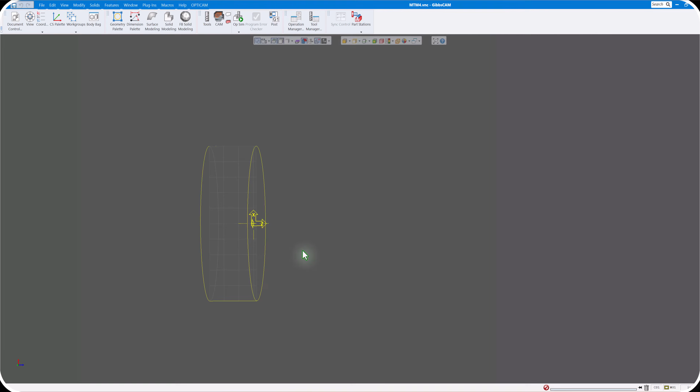First, make sure you are on the correct machine. In this case, we're going to do Mori Seiki DMG NLX 2500 SY. You can choose any other machine because we'll be programming it the same way, whether it's a Mazak, Doosan, Okuma, Nakamura, just about any machine with a main spindle, sub spindle, and a single turret. This is a single turret tutorial, not a double turret. So first, choose your machine, and we'll leave these blank for the moment.

For main spindle, let's jump down to sub spindle, and for right now, let's just zero these out.

We'll go to no zoom, let's go to top view and no zoom. You'll see we have a main spindle and sub spindle, but we don't want to have both of them showing at the same time, because when I do a no zoom, it shows both. I just want to work on the main spindle right now, then we'll go work on the sub spindle by itself. So the first thing you usually want to do is go to the part stations and turn off the sub spindle by clicking on the eye. Now when I click on no zoom, you just see the main spindle.

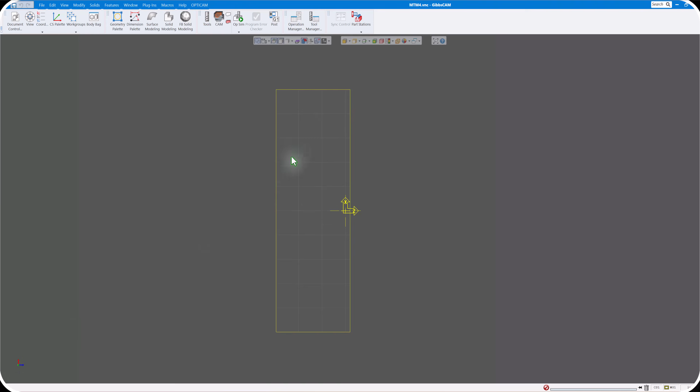So we'll work on the main spindle, then we'll work on the sub spindle, and then we'll do the rendering, and so on and so forth.

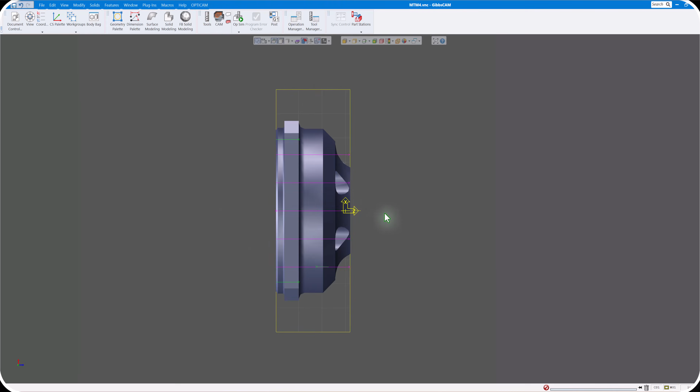Next we want to bring in our solid model. So let's go to File and Import. This is a SolidWorks file, so just open that. Now we have our SolidWorks file in here. It's already in the right orientation. Now I want to get rid of these here.

I'm not going to do feature recognition on this part. So what you do is go to View and turn off the Show Hole Features. If you want to use feature recognition, you could use this Hole Manager - it'll find all the holes, dimensions, and everything else for you, but we're not going to do it in this tutorial.

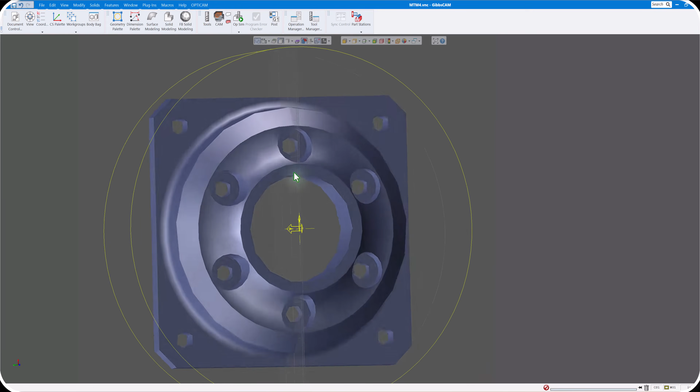Now you also notice it's a little bit chunky there, and the reason is I have my preferences set at 10 thousandths. So if I go to File, Preferences, you'll see it's set for 10 thou. This should be 1 thousandth - when you originally set up GibbsCAM, you should have the chord height at 1 thousandth. Just to let you know that as well.

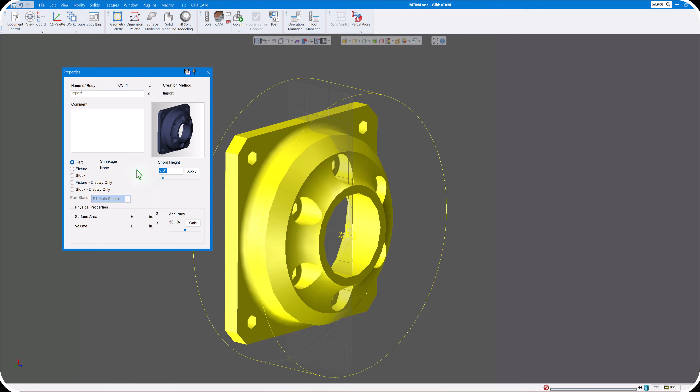But let's say we brought in our solid and we want to change it. If you brought in a bunch of solids and want to change them, just click on your solid there. If you have multiple solids, you can select them all. So let's select our solid, right click, go to Show Properties. If you had a number of solids, you could go Show Properties of Selected, which would show them all. But we just have one part, so right there you can change it to 1 thousandth, which is pretty good for just about every size part. You can see that looks a lot better. That's one way to change it on the fly if you've already brought in your solid model.

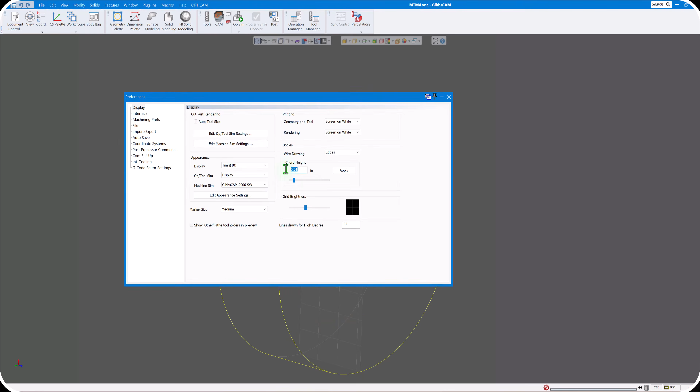But let's show you if we went back to File and had our preferences already set to 1 thousandth, click Apply. Now anytime I bring in a solid model, so import this again, you will see it's already nice and smooth and round, so everything looks pretty good.

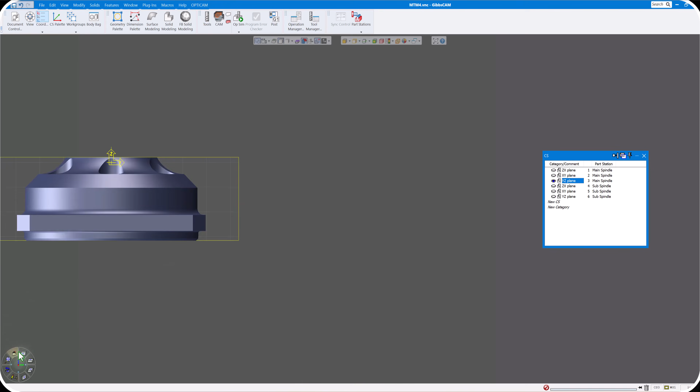Now you always want to check the orientation of it, especially when doing milling. Like when I'm doing milling here, I try to choose and rotate it to where it's easiest to program. In this case, if I went to my coordinate systems and went to the YZ plane and clicked on the home view, you can see this flat is parallel with the YZ plane, which is how I want it anyway, so that's good. So it's all oriented correctly.

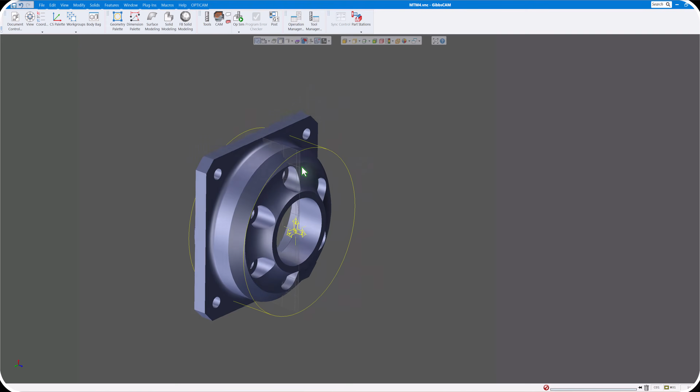So let's just do Modify and Shrink Wrap, usually what we do, and it shrinks material around the part. Now in the case of a square like this, with some corners on it, it's not necessarily going to find the outer dimensions. So I'll go to Document Control, back to Main Spindle, and change this to 2.5 inches. We'll look and see, yeah, that'll clear everything on our part. So that looks pretty good.

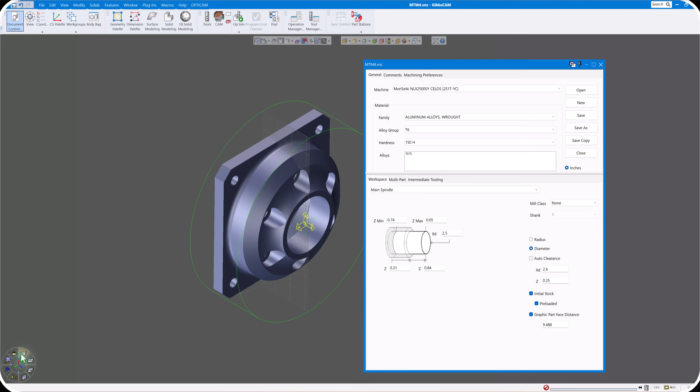Okay, if we go to Document Control again after doing a shrink wrap, you can see this origin right here. If I go to a side view, you can see it's back behind our part. Since we did a shrink wrap, it says the material is 50 thousandths in front of the origin.

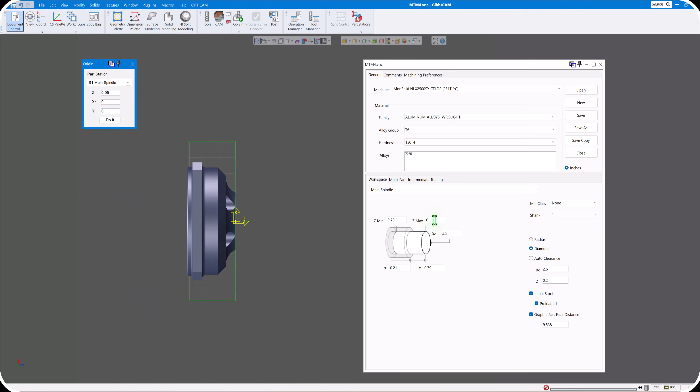So I want to move the origin to the very front of our part because I want this to be Z0 when we machine it. To change that, go to Modify, down to Move Part Origin, and change the Z to 50 thou. Click on Do It. Now you can see our origin is right at the top, and it automatically changed the dimensions in here for us. So we have Z0 there.

Now, before I fill out the rest of this, I want to see what our material needs to be before we start doing any machining or geometry. So we want to figure out all these dimensions. We can see it's 0.79 from the front to the back of the part right now, but of course we need to add material for this as well.

Right now I want to add 1/8 of an inch of material on the front, and maybe a little more on the back because my jaws are going to be sitting right around here, and that's not much to hold onto. So we'll add a little more stock to the back side. As far as the front goes, let's add 1/8 inch there, and you can see there's our material, 1/8 of an inch. Now if I put in, it says 0.79, minus 0.125, that makes it 0.915 — kind of an odd size for a saw cut, so I'll just say minus 1 inch on there. That'll give us plenty of room to grab onto and machine.

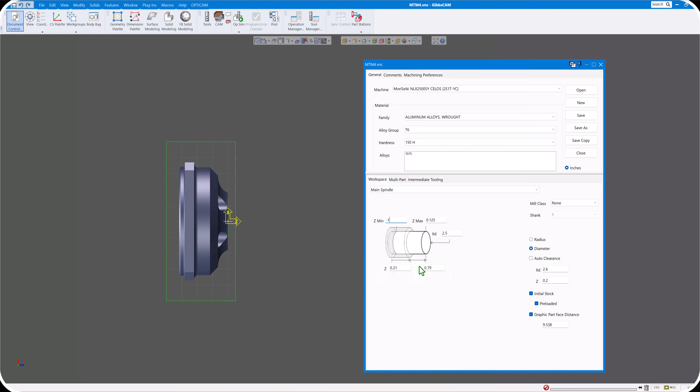So next, before we fill in these two, I want to pull the geometry off the part so we can do some measurements. I'll click on the profiler right there where it says Slice Spun Body — that gives us the geometry we need for machining, for turning. I'll click on the green area, it turns blue. Right click, click Extract Profile, click Do It, then turn off the profiler. And there's your geometry to machine the part as far as turning goes.

Now I want to add a few more dimensions here. This will make it easier to put in the correct dimensions on the sub spindle. So let's bring up the geometry palette and click on the point command, XYZ. I want to put a point out here, 1/8 of an inch there — this will make more sense when we go to the sub spindle. I'll go up 1.25, and we'll say 2.5 because that's the material I made it out here. This could be at 0, but we'll keep it up here — it'll be easier to do dimensions.

So click on the double point, so I have a point there now. I'm going to go minus 1 inch, do a point there, and you can see that's at minus 1 inch.

Okay, now we can do some dimensioning here. Bring up your dimension palette. I'll choose this one right here, and click on this icon as well to make sure it stays open. I want to put a dimension from here to probably right here — that's probably where we want to grab with the sub spindle, right before the radius. So I'll put that there.

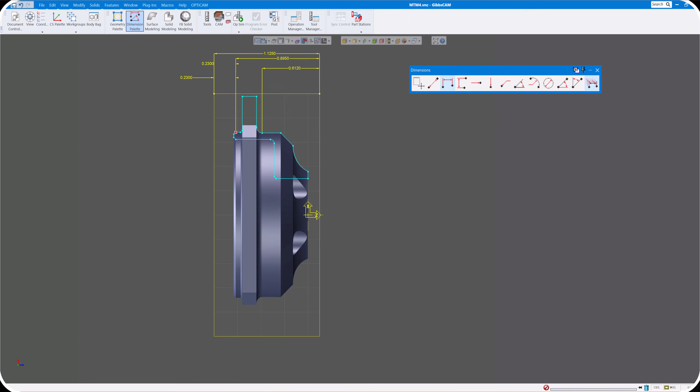I think that's all the dimensions we really need for right now. This will make more sense when we go to the sub spindle, telling Gibbs how much material is sticking out. So everything looks pretty good right there.

Okay, so let's bring in our tool list. I haven't created one yet, so let's just import our tool list into here. We're going to go to station number 1, right click, go to load tools, and this is our tool list for class 6. This will be on the YouTube page as well, so you can download it if you'd like. But here's all the tools now. Let's just go through all of them.

This is going to be an 80-degree diamond, CNMG, 32nd, half-inch IC or inscribed diameter, 1/8 inch thickness. This could be 3/16 as well, whatever you'd like. It's in station number 1, and you can see it right here. The length out is 6 inches - I think I want to change that to 4 though. I always give it a name on here, so when we put the code out on the machine the operator can see exactly what this tool is supposed to be doing. So I just put main spindle, rough face, and OD. This is, of course, offset number 1, X positive side.

And we want the insert facing backwards. We don't want to click on insert face up because that's an M4, and that'll force the chips into the operator or the front of the machine. We want the chips to stay at the back of the machine, so that's why I have it sitting in this direction.

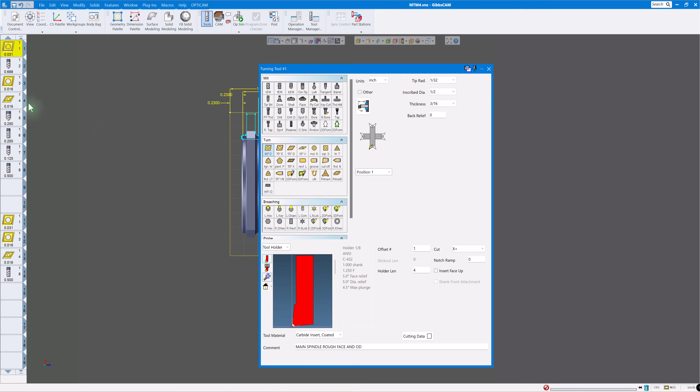Let's look at tool number 2. This is just a drill going through the part. I have 175 degrees, so it's almost flat. So if you have an inserted drill, you could do that, or a carbide saw, whatever you'd like to do for this. And of course, give it a name: main spindle drilling. I have length out of holder 3, tool length offset 2. This should also be 2.

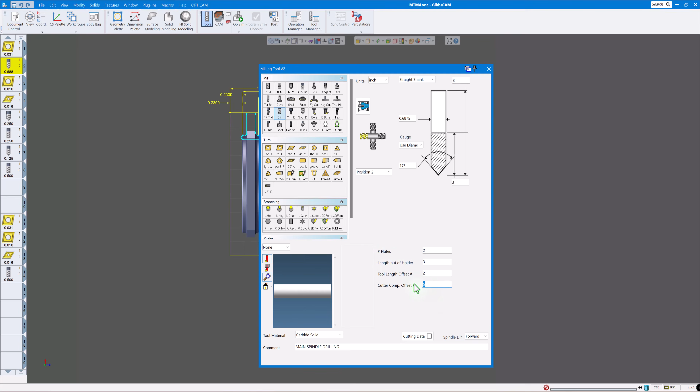Just to clarify, this is going to be the boring bar here. So this is a 64th tool nose radius, 1/4 inch IC, station number 3. Now I don't know if I want that small of a boring bar. You can choose that - you can see minimum bore is 600 there. I haven't dimensioned the bore yet.

Let's put in a dimension there just so we know what that actually is. So we'll put this bore right there - that's 3/4 of an inch. So this is 600, so that's probably okay. If we go bigger than the actual part size, then Gibbs will not let the tool go inside there. So this looks pretty good, we'll keep that there.

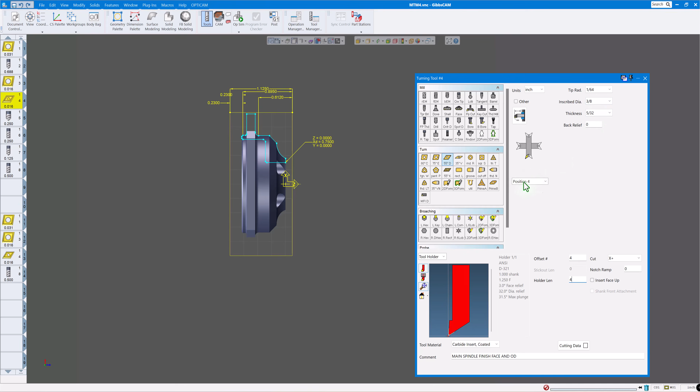Next tool is a 55-degree holder. We'll change this to 4 inches as well, with a 64th radius, IC 3/8, 5/32, station number 4, offset 4 - so make sure all this matches. X plus.

This is going to be the holes in here. This is going to be, of course, a spot drill first in position number 5, 1/4 inch, 2 flute. Then we have our 1/4 inch end mill to do the counter bores, and 1/8 of an inch for the holes in there, and 1/2 inch to cut the periphery of the hexagon there with the square with the corners. And then the rest of these are for the sub spindle.

This is going to be also a CNMG 80-degree diamond. It's in for the sub spindle. We'll change this to 4 inches as well. And this is going to be offset number 17 - so we're adding 16 to this to make an offset 17.

Now you can change this to whatever you want, depends on your machine manufacturer what the sub spindle tool will be, but just make sure this offset matches the sub spindle for the backside tool. You wouldn't want to give this position offset number 1 as well, because we already have that up here at the top. So this has to be a different offset, but it's going to be in the same turret location, position number 1.

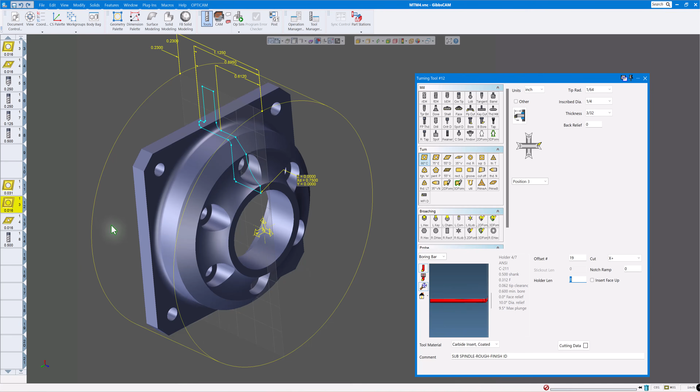Okay, next one is going to be a boring bar to finish off the back side. As you can see, we have backside boring that needs to be done as well. We'll unzoom this and go to home view there, and again, give it a name.

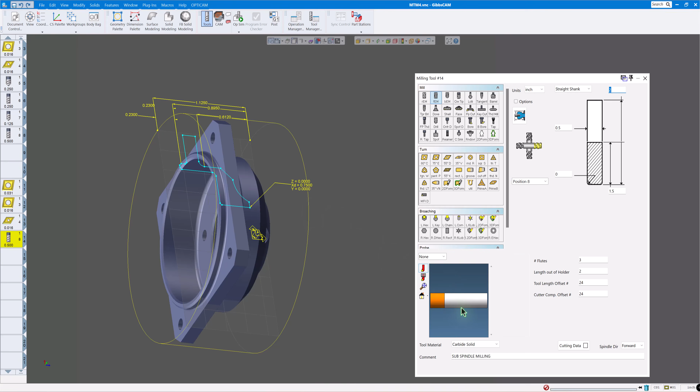And of course, 55-degree on the back side. That's going to be in position number 4, same as up here, but a different offset, so I chose offset 20. And then a 1/2 inch there to finish off the back side. I think we have all the tools we need there.

So let's unzoom this, home view, unzoom. Now let's open up our document control, fill in a few blanks here. Main spindle, 2.5, this is correct, all here.

Now we need to figure out how much material is sticking out of the jaws from when we grab it on our main jaws here. As you can see, since we dimensioned it, we're going to grab right here with our jaws. Dimension 895 is sticking out from our jaws on the main spindle to our stock. So right here, put in 0.895.

Okay, now it needs to know also how much is actually in the jaws there. As you can see from right here where our jaws are going to be to the back is 0.230. So I'm going to change that to 0.230. All right, that's good, everything's there, perfect.

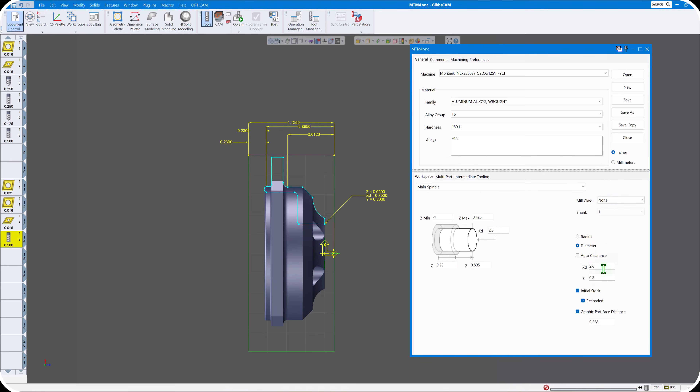So we have diameter we want to program, of course, in inches, we don't want to program millimeters, we're in inches. We have 2.5 inch stock, 2.6 will give us enough clearance for this. You can always go bigger, it's up to you. And instead of 0.2, I'm going to round this off to 1/4 inch there. Initial stock means it's already loaded in the spindle when you press cycle start, and preloaded.

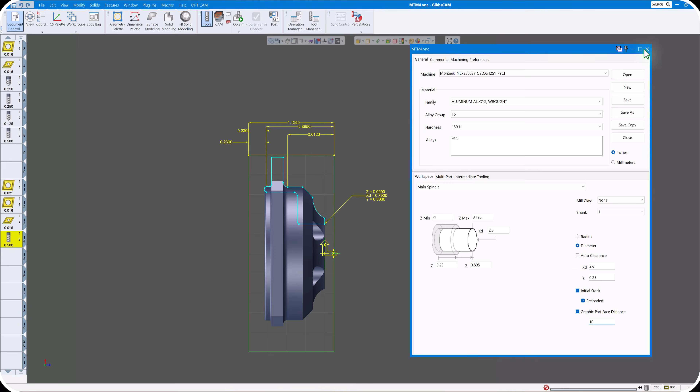Okay, so it's all ready to go. And this graphic part face distance right here, I'm just going to put 10 inches in there. Now what this means, let me just show you. We'll put 10 inches in there. Let me turn on the sub spindle just for a moment. Now if I go to no zoom, you can see that's approximately 10 inches there on our screen.

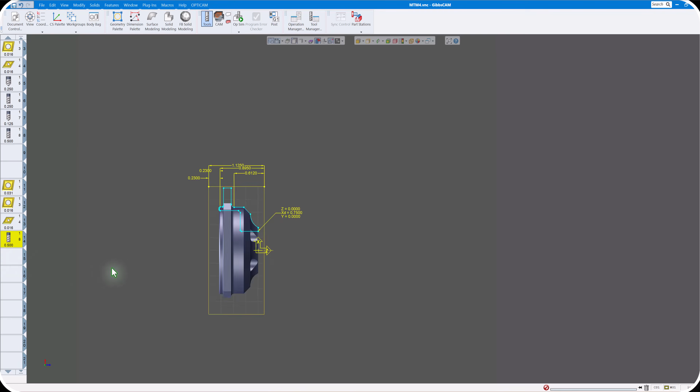Now if I put what the actual machine is, which is around, let's just say 25 inches there, if I do that, when I do a no zoom, you can see how much space there is between the two. So you're always having to zoom this up and work on that and zoom up the sub spindle. And so it just makes it easier. The programming will still be the same.

Your G-code output will be the same no matter what you have in here. This is just the distance that you see on your screen between the two spindles. So that keeps you from having to pan main spindle, sub spindle. So let's just put about 10 inches in there, that's usually about what I do most of the time. And no zoom, and you can see now the spindles are a lot closer together, so when you do rendering, it's easy to see the two spindles without having to do a lot of panning.

So let's turn off sub spindle for the moment. We're going to just program the main spindle right now. I'm going to turn off dimensions. Okay, I'm going to turn on my cam.

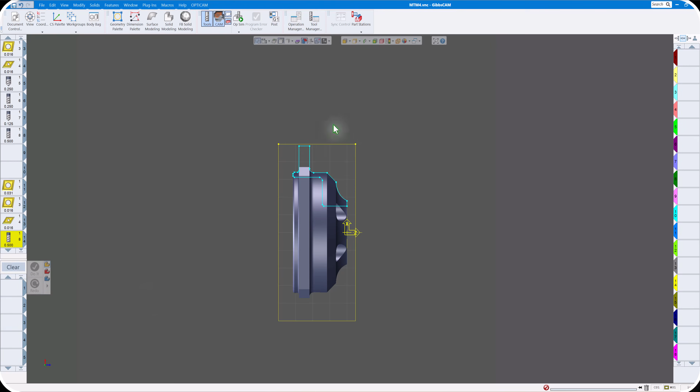So the first thing I want to do is, of course, face this off. So I'm going to put in, just double click this process, put in a roughing process there with tool number 1. We're going to do a front face. This is our clearance values before we cut, clearance before we go back home or do the next operation. And we have an 1/8 of an inch material to face off here.

I'm going to say cut depth 50 thou there. We're cutting forward, front face, all that looks pretty good. XR stock, really don't need anything there, but Z stock, I'm going to leave 3 thou there for the finish pass. Now, depending on the material, you can click on the material, speed, RPM, and feed.

And of course, depends on your material. We chose, as far as the material goes, aluminum alloys, so you can, of course, change whatever material you'd like there. And since we're facing it off, I'm probably going to do constant surface speed, and we'll figure that out, surface speed 8,000, which is a little fast. And since it's aluminum, you'd probably be okay, but let's just change this. I'll show you how to change this.

So let's go to the material, and this is the material database. Let's modify that database. Let's say surface feet per minute is suggested 8,000. That's a little faster than I want to go. I'm going to say, let's change this instead of 8,000, let's change it to 2,000.

6 is okay for right now. So we just modified the tool database. Material database - let's just do surface feet per minute. You can see now it's 2,000 surface feet per minute.

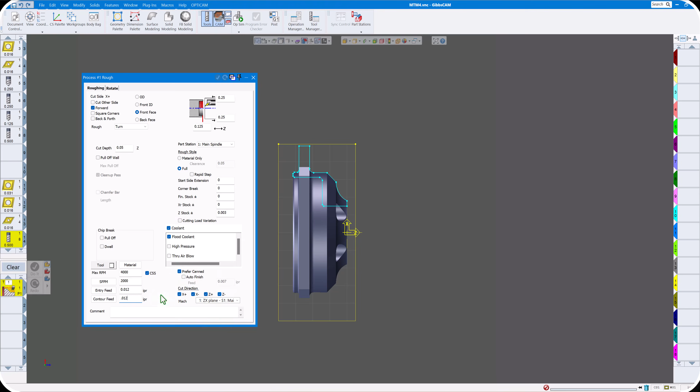Okay, so let's click on this front face right here. This is what we want to finish. You can drag this marker to above your stock, or you can right click and say move to whatever you'd like to put in there. It's up to you. If you want it a certain distance away, that's up to you.

Of course, arrow down, we want to face from the top down. And we want to put the black round one close to X0, Z0. Just don't go below it. If you want, you can put a point there and just have it snap there.

And you can also right click and say, I want to move it to the endpoint, maybe you want to move it right to 0. That's up to you, that'll put it right at 0. And then click on Do It.

So there's our toolpath there. If we want to render, we can render right at the same time. Slow it down, and so you can see, looks pretty good so far.

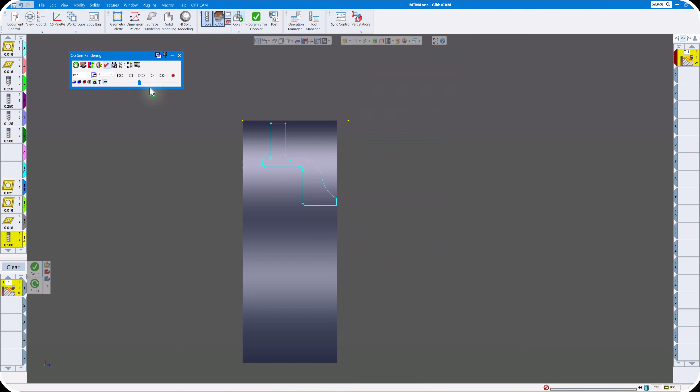Now we're using the same tool to cut the OD, so we chose OD. Remember, we have our clearance at 2.6, that's fine. This is the material, 2.5 inch.

This time I'm going to say cut depth of 1/8 of an inch is just fine. For XR stock, I want to leave some stock to finish, so that'll be 10 thou per XR radial value, so 20 thousandths overall. Everything else there looks pretty good.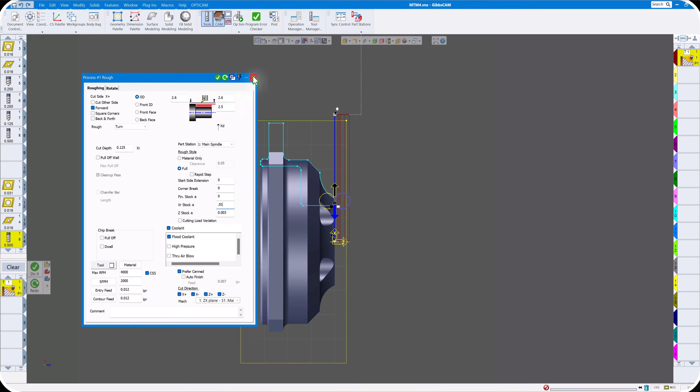Canned cycle, all that looks good there. So I'm going to click on this radius to start out with, start outside of our part a little bit. The easiest way is just hold Control and Shift, click on the last feature you want to cut, and we'll go a little bit past there. We don't want to go into our jaws - remember, our jaws are right here, so we don't want to go too far past that. Click on Do It - now we have our roughing finished out.

Okay, let's clear this. Now we want to drill this before we finish the outside because of stress relief. So this time we want to do holes, and this is not live tool, this is static, so hole, with our 0.688 drill.

Okay, front face. We had our clearance set at 0.250, so I'm going to keep it there. And we faced almost everything off. There's 3 thou there, but we can have 3 thou in there or 0 - it doesn't matter, either one's good.

Let's click on this button right here, and you can see the line goes down to the edge or the chamfer on the actual drill there. And we'll hold the Alt key down and click on there. Remember, that was 1 inch, so that's right to the stock there. We want to go a little bit past, so I'm going to say minus 1.1.

Okay, again, we can put in our RPM feed rate there. Pretty good. Canned cycle, everything just feed in, rapid out. You could choose peck in that, but if you have high pressure on right here, then you really don't need to peck - you can just blow through there. So let's click on Do It.

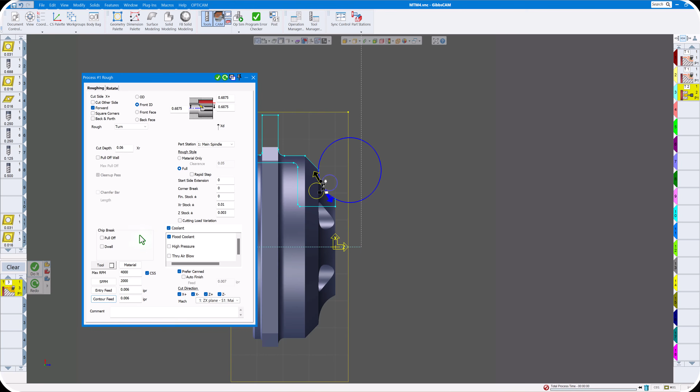Stock and Z is just fine. All that looks pretty good there.

Let's click on the bore there. We want to start outside our part, going from the right to the left. Our black one goes to the end of our part, a little bit past it, so we make sure the bore goes clear through it. Click on Do It, and we have a couple of passes in there, not too many.

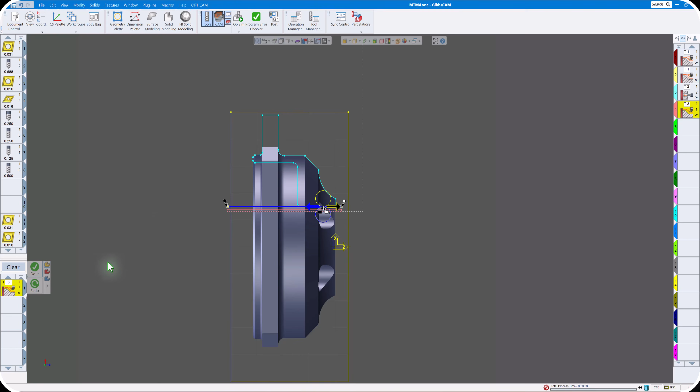Now since we've roughed everything out, at least on the front side, let's finish it. Let's clear this out, double click, and do a contour with that same boring bar. Front ID, about the same place we want to wrap it to, main spindle, 90-degree line there, so we'll come off there, which is fine. Entry and speed, all this looks really good.

Okay, everything looks good there. Let's move our markers around, starting off our part in that direction. We actually just need to finish here because on the back side we'll cut all this out. So let's do it. One thing I need to choose though is the cut on the inside, not the outside. So instead of deleting this, just click on redo, and that'll redo that toolpath.

Okay, so all that looks pretty good so far. Let's do a rendering, see where we're at. Let me slow it down and start over.

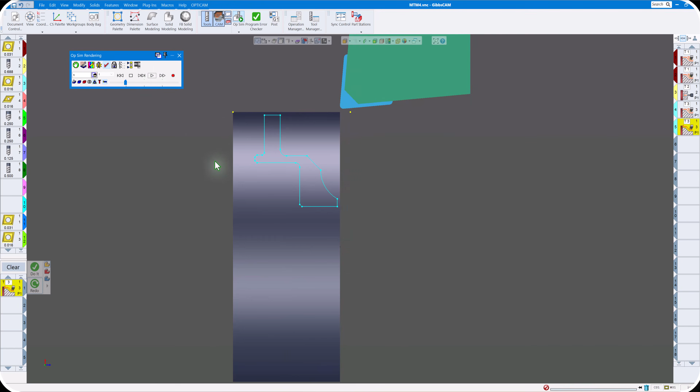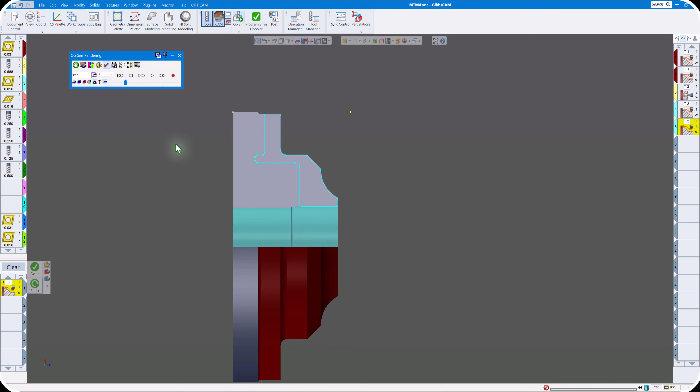Face. Now we're roughing the OD. And of course drill, let's show you a cutaway view there. And bore and finish bore. So far so good. Okay, let's finish the outside now since we finished the ID.

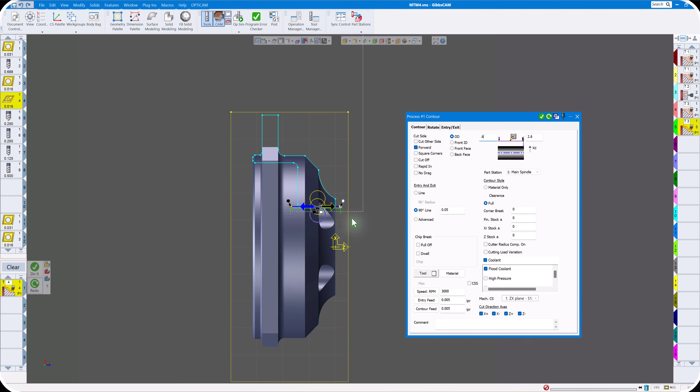So we can leave contour in there, let's just open that up, and of course bring our tool down. You can just drag and drop a tool on top of there - that's tool number 4, we're going to do the OD. Now I don't want to start at 2.6 up here and then feed all the way down here. So we know our bore is 0.688, so let's just rapid to 0.6 there. The tool is going to rapid to 0.6 before it starts going in to cut. We have a 50 thou line in there before we start cutting. Entry feed, and all this looks good.

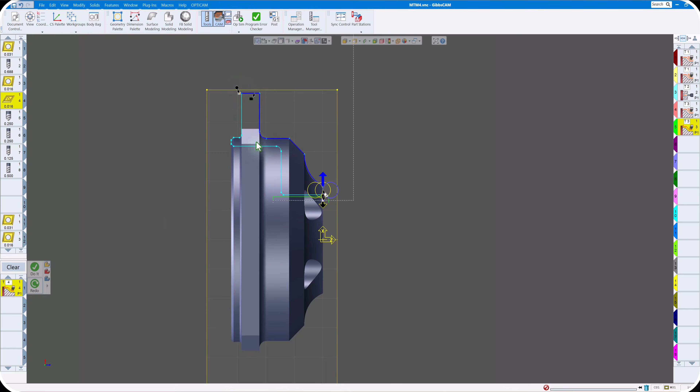No stock there. Okay, click in space. I'm going to start right here, zoom up a little bit, lower than our bore, that direction. Again, I'm going to hold Control and Shift, click on this last line here, and just a little bit past there, and click on Do It. Now we should have a finish pass there for our part for the OD. So there we go.

And that looks good. So everything on the front side has been all machined as far as the turning goes. Now we need to do some of the milling.

So let's just go back to isometric view, and I'm going to give it a new work group. This work group was the original one - I'm just going to call this turning. I'll turn on caps there, a little easier to see. So this is the turning.

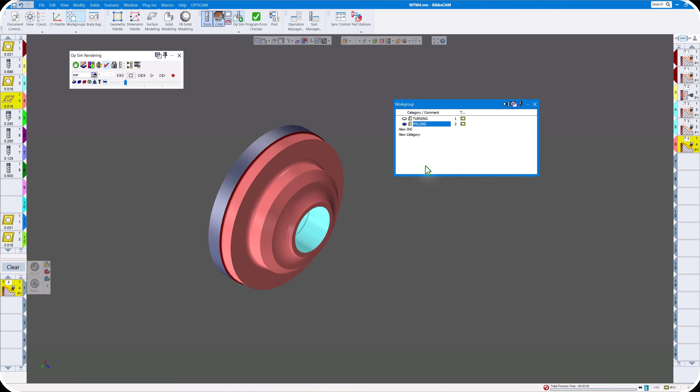I'm going to separate the turning and the milling so it's easier to choose what we want to cut. So I'm going to click on new work group and call this milling. If you want, you could put turning main, milling main, and then turning sub, but we'll just keep these two here for right now. So now we have another work group, and as you can see, the geometry is gone for the turning portion of it.

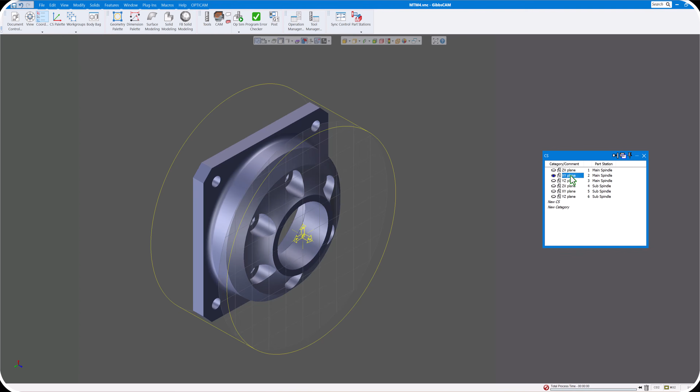Let's turn off our cam because we need to bring up some geometry. I'll turn off tools while we're at it. And since the tools are coming from the face, I need to change my coordinate system to the XY plane - as you can see, that changes right there.

Now we can extract geometry, or we can use a profiler, or a combination of both, but let's just do face selection right now. Let's just click on this face right here. Looks like we have a little radius in there, which is okay, so I'll probably use the profiler instead so I don't cut it undersized when I'm milling.

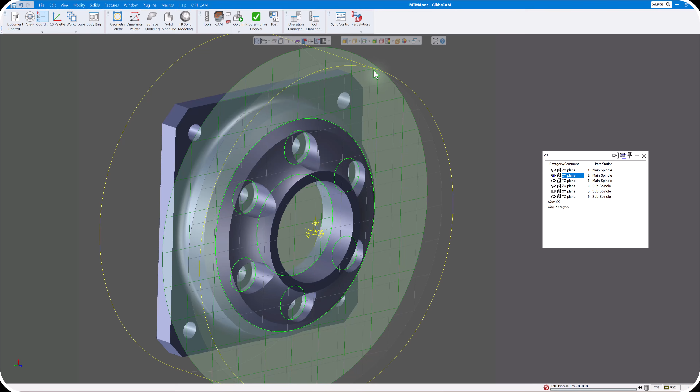So let's just go to the profiler - you can see the profiler, drag it. I'm going to drag it about down to here. You can always right click and go profiler depth and give it a depth, but this is good enough as long as it's off the radius there. And since this is a pretty good part, I'm just going to do polar and cylindrical, so it'll rotate each hole there. So I only need to extract this hole for right now - it'll give me that one.

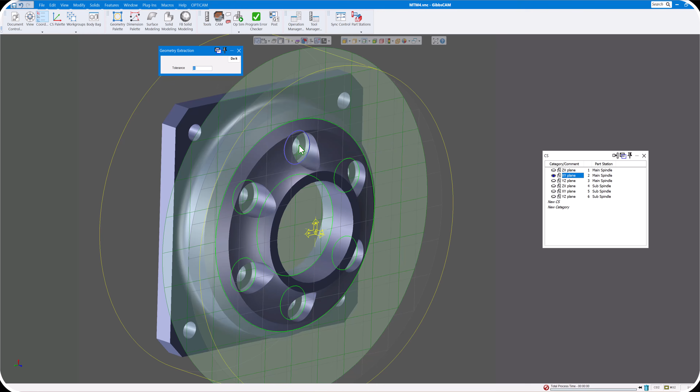I really don't need to do this one other than to get measurements off there. So while we're at it, we'll drag it through there and extract that geometry. Maybe while I'm here, we'll do the back too, and click this hole right here. That's good, and I might as well get the square with the corners. Just click that, extract that.

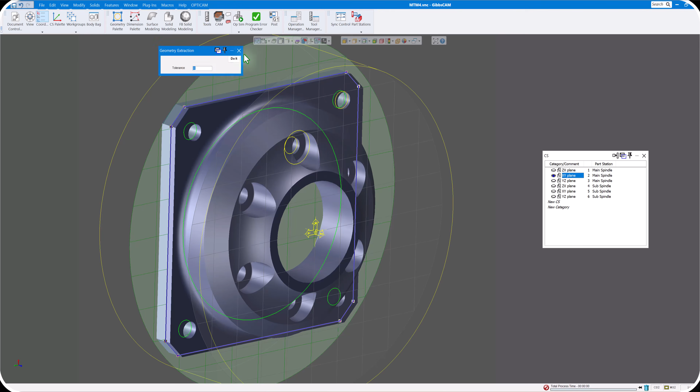Now we can turn off the profiler. You can see I have pretty much everything I need to cut that front side there. If you want, you can move all these out to Z0 or the depth you want. That's up to you, but we really don't need to for this part.

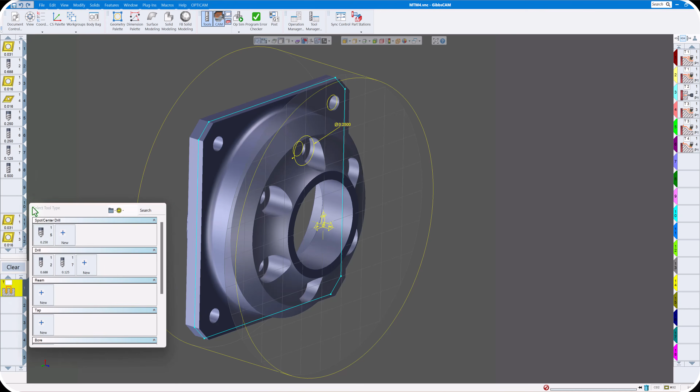Okay, so let's open up our tools and cam. Let's clear out the first process. Then the first thing we want to do is a milling process. We can't really drill on these angles with this radius here, it'll deflect the tool, so we have to do some end milling first before any drilling. So let's create a process, a drilling process with the 1/4 inch end mill.

Scroll down, find our 1/4 inch end mill. We can't interpolate these because the counterbore is 1/4 inch and our tool is a 1/4 inch. So we're going to use a drilling process, and instead of feed in and rapid out, we're going to do a peck with a full out. Since it's an end mill, we need to clear the chips here, so we're going to do a peck with a full out.

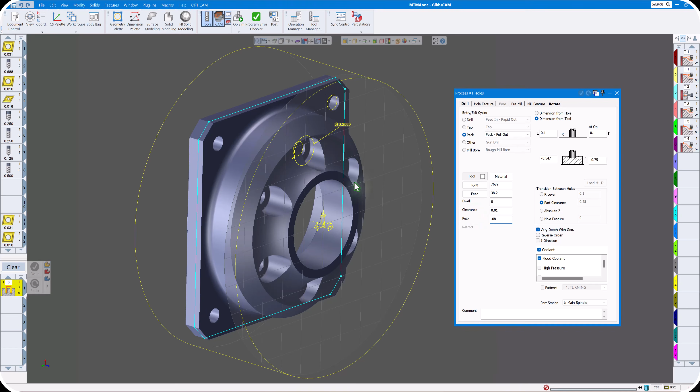RPM and feed rate, don't need a dwell clearance. I'm going to go 10 thousandths. When it comes back in, it's going to be 10 thousandths away from the last cut it took, and then go in again. So we're going to do a peck of 80 thousandths, and we're going to stay at 0.1 rapid. Let's just look at the clearance here - we could get a little closer, but we're going to stay 0.1 away.

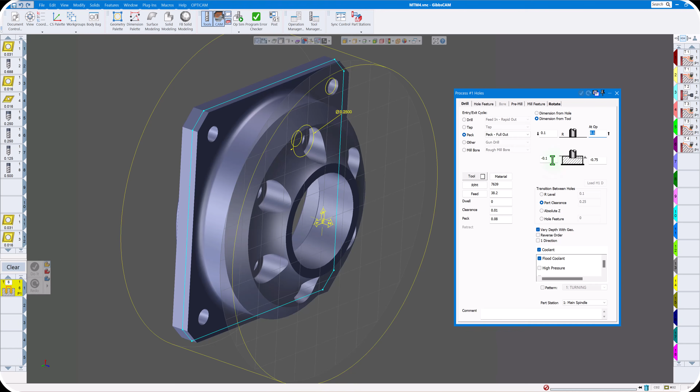We could adjust that if we need to. The mount, or the surface, the material we're going to start cutting at, I'm going to say it's minus 0.1. We're just going to guess right there for now. 0.1 there, and the depth - so highlight the depth, hold the Alt key down, click on the face that we want to go to, which is minus 0.27. And we don't need this. Part clearance, we could probably stay at the R level 0.1, and we're probably really good right there.

So let's go to the rotate tab. First, make sure we're on the right plane, which we are, XY plane. And we're going to do polar and cylindrical because I don't know if our machine has enough clearance to keep this locked with a brake on and go around each station here. So we're going to do polar and cylindrical. And we have 1, 2, 3, 4, 5, 6 slots.

So I want to do it 5 more times because we already are doing the first one. And to get the angle, we could just type in 360 divided by 6, and of course that will be 60 degrees. We'll click on, you can click on either this one or this one - since we're doing a drilling cycle, Gibbs doesn't care which circle you really pick. Let's click on do it. Now we have our polar and cylindrical around the part there, and then we can stop and take a look.

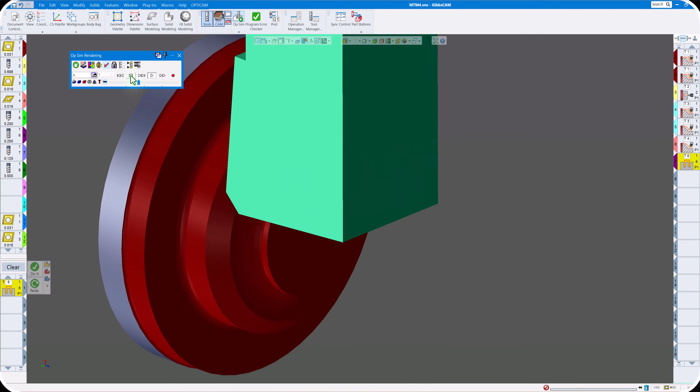So if we go to our rendering, we'll turn off geometry there, and click on play. Let's have our facing, of course. Drill, finish, finish. Now we're going to do the counter bore. And it looks pretty good there. So our counter bores are done. Let's go back to ISO view.

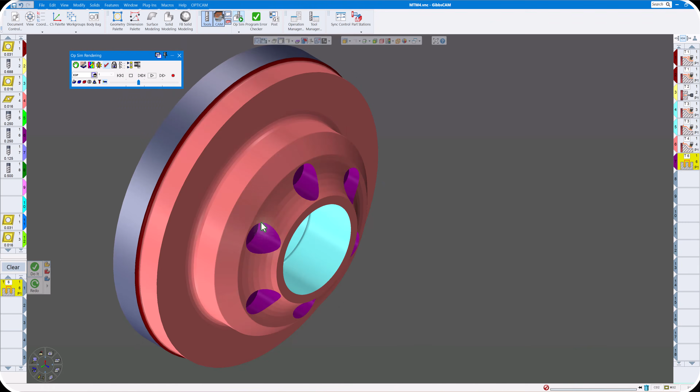Next, we're going to do a spot drill because we need - now that we have the flats on here, we need to do a spot before we let the drill go in there. So we're doing still a drilling process, but let's do it with a 1/4 inch spot drill. And again, this time we're going to rapid it a little bit closer down to the hole.

So I'm going to Alt click the hole there - that's minus 0.27. We don't want to go rapid to there, but we want to be able to clear this radius here. And since these holes through the part are 1/8 of an inch, we just want to spot drill them to take a little chamfer on there so we don't have a burr there. So we're at minus 0.27. So in this diameter right here, we tell Gibbs what we want that tool to cut.

So we have a 125. If I put 135, it'll adjust the depth automatically for us. If we go to the rotate tab, everything there is good. Check our RPM - probably really don't need to go that fast for a spot drill.

So let's just go with 2000 there, and we don't want to do a peck. We'll just do a feed in, rapid it out. Everything there looks good. Let's click on there, click on the actual geometry, click on Do It. Then let's take a render and see how our spot drilling is going.

So spot drilling looks good.

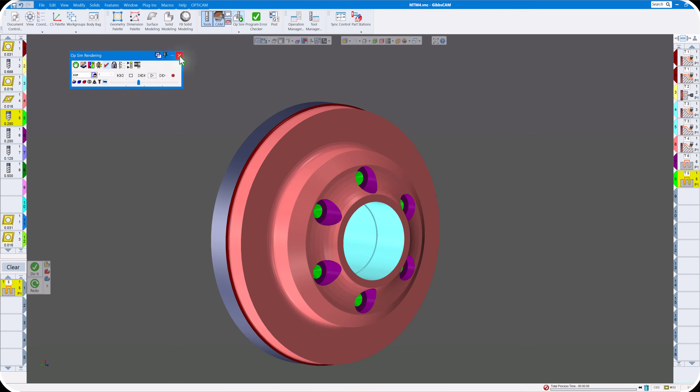Now the next thing you want to do is drill through the part. So we use the 1/8 inch drill, just drag and drop. Everything there is pretty good here. We want to go clear through the part though, at least to the back side there. So if we rotate our part a little bit, at least to this surface here.

So I'm going to highlight this box right here, hold the Alt key down and click that surface there. We can see it's minus 0.36, that'll just barely get us through there. I want to go a little bit more, so minus 0.370.

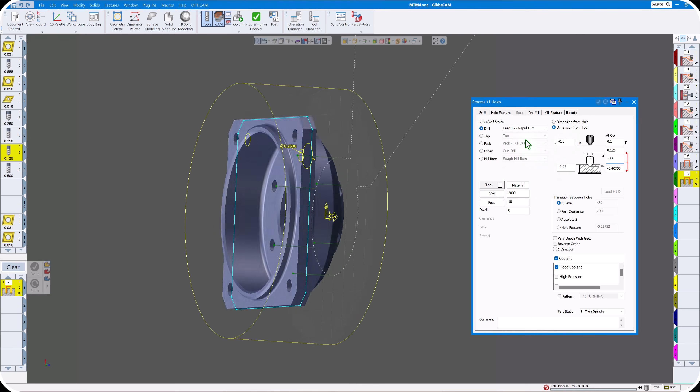And this time we'll do feed in, rapid it out. Be pretty good with high pressure, that should work very well. Okay, again, we'll highlight this hole here and click on Do It. And if we render, we'll see now we have the 1/8 inch holes through there.

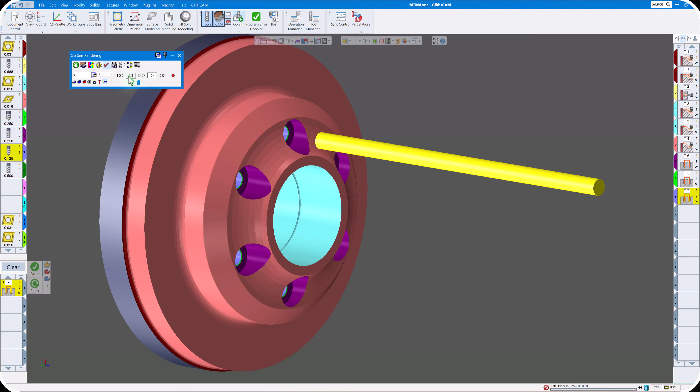With a little bit of chamfer on there, you'll see - so we don't have the burrs on there. So far, so good. Now the next thing we want to do is cut the flange and drill the holes through there. So this is what we have so far.

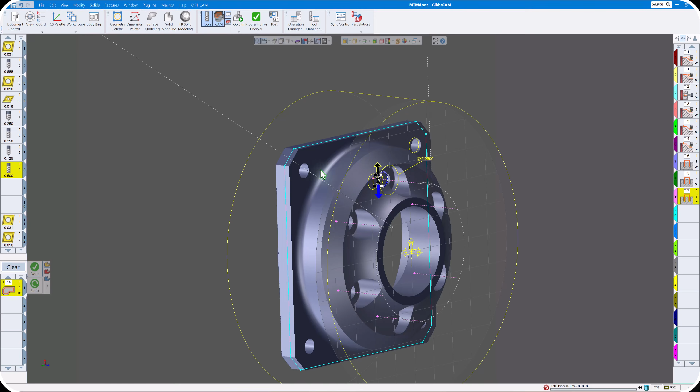Now we need to drill the holes on the flange out here. This is using the same spot drill and the same drill through there, also 1/8 of an inch. So let's clear this out and let's do our spot drill - drill and our spot drill there.

And again, we're going to rapid it a little bit closer to this flange, so I'm just going to hold down the Alt key. That's minus 0.547 - I'm going to say minus 0.5. And this will be minus 0.547 because that's the surface we're starting from. And here, the 1/8 inch hole goes through.

So I'm going to put 135 as well for the 1/8 inch. Everything else looks pretty good, but let's go to the Rotate tab. Now this time we just need to do 3 more holes because we were already doing the 1 hole there.

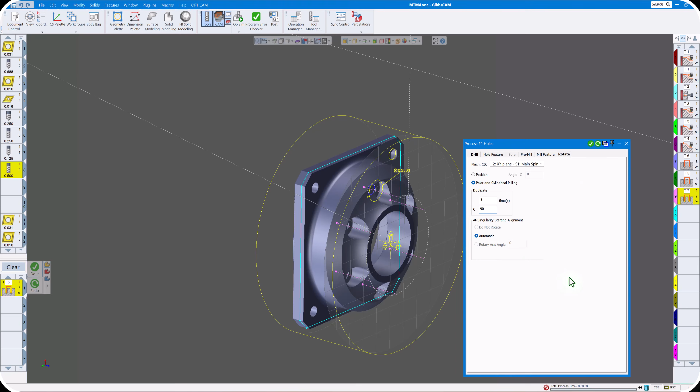So we just have 3 left here, and each one is going to be 90 degrees. And if we click on the first hole there and click on Do It, then we'll have the 4 holes through there. Now let's look a little bit - I want to rapid all the way out to do each hole.

I want to get a little bit closer so we're not wasting so much time. So what I need to do here is change this, because right now it's doing 1 hole, rapiding to 0.1, going to the next hole, rapiding closer in, then back down. We could just stay at that level here, so I'm going to say right here, minus 0.5.

Let's redo that. Now you can see the first hole rapids to here at 1/2 inch, then it spots, and it stays at that minus 1/2 inch. Go to the next hole, next hole - this is the last hole, then it's going to, of course, come out.

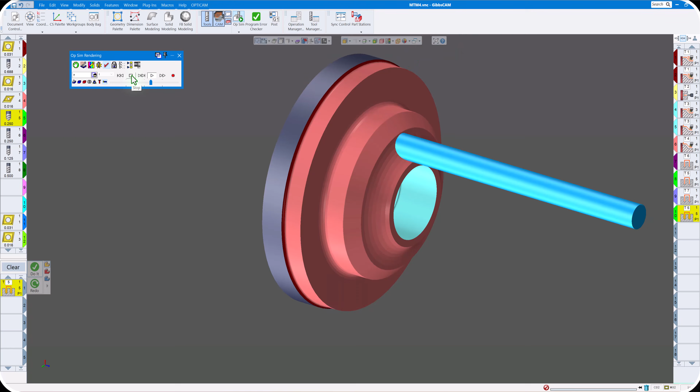So if we render this, we're going to see exactly that. I'll stop it when it gets a little closer. Okay, now we'll slow this down - you can see it's staying at the minus 0.5 inch level, so it saves us a little bit of time there.

Okay, next we want to drill the 1/8 inch drill through the part. So let's just take the 1/8 inch, drag it down through there. Again, everything there looks pretty good except for the depth there. So we're at 547 - we'll just double click, Alt click this face, 547.

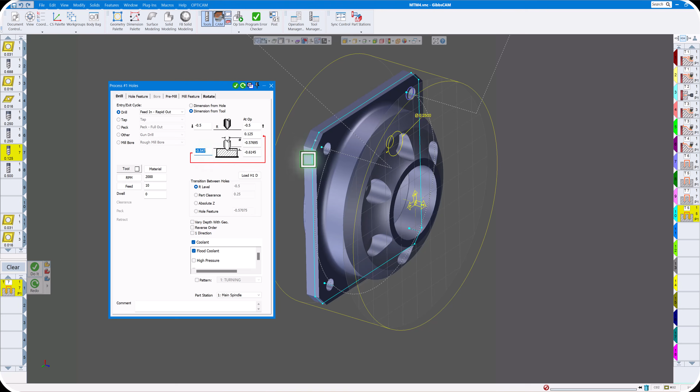But over here, I want to cut to this flange right here, the back of the flange, 0.7, minus 0.7. I'm going to round that off to minus 0.750 to make sure it gets through there.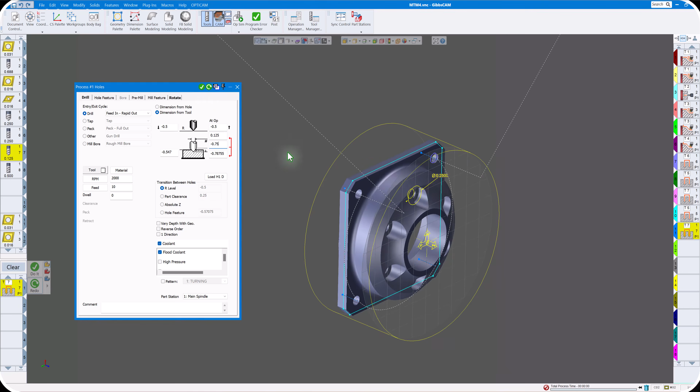Click on the hole, click on Redo, or Do It, depending on what you selected there. Now we have our hole through the part, so let's render this so far and see where we're at. We'll speed it up.

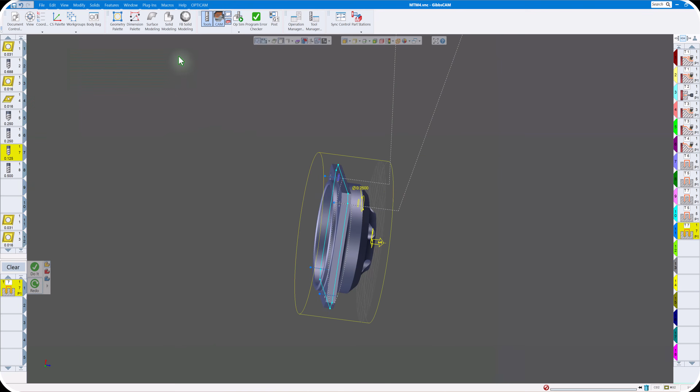And we have our holes through there. Looks good. Okay, so the next thing we want to do now, let's go back to ISO view.

We're going to cut the flange here. Let's clear anything out, put in a contour with our 1/2 inch end mill. Now I want to rapid to 0.1, which is fine. We could rapid a little closer in, but that's okay.

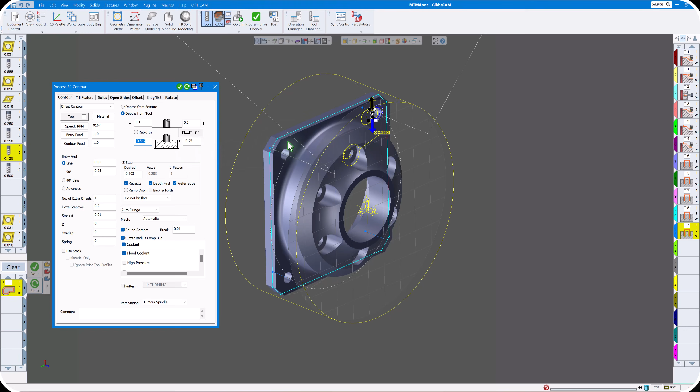I want to stay here and feed in on here so we're not rapiding in. And of course, Alt click this surface. It's minus 0.547. Alt click the back here too, and you can see it's minus 0.7. I'm going to round it off to minus 0.750, which will stay away from our jaws holding the back side there.

Of course, adjust your RPM and feed rate. We want to do an entry and a 90-degree line there. I want cutter radius comp on in case I want to comp for the size, depending on how accurate I want this to cut. Round corners with a hundredth break on all the corners, so we won't leave a burr on the corners there.

That'll be good. I probably want to do maybe 3 extra steps. Normally this is set at 0 - you can see that's the normal - but we want to do probably 3 extra steps there, at 1/8 of an inch per step. I want to leave stock on the whole thing.

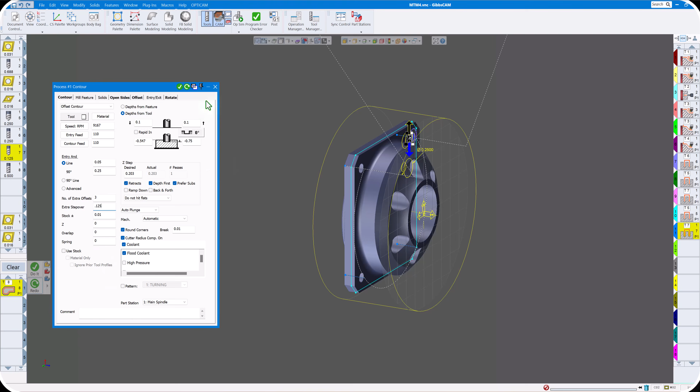Now if you want, you can go to the home view there. I want to start on this side, above the X side of the part. Click there. Of course, we want a climb mill, cutting on the outside. Going to click on Do It.

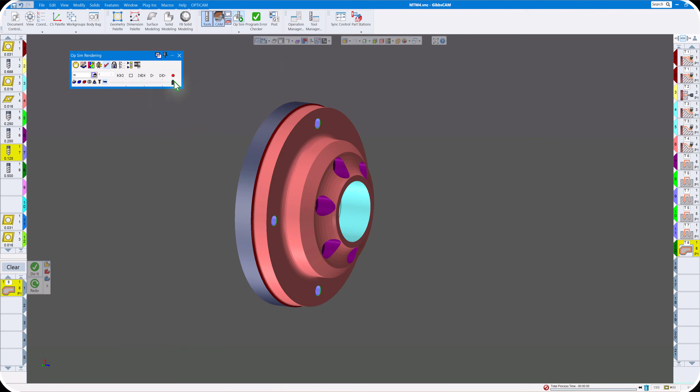There's our toolpath. Let's render to see if this is how we want to do it, or adjust anything. I'm going to click on the stop sign here and say stop before operation 12, which is this one here. So we'll speed everything up and rewind it.

Now it's stopping, so it's going to go to operation 12 now. We'll see if this catches our part there. Not quite, so we could probably reduce that to maybe 2.

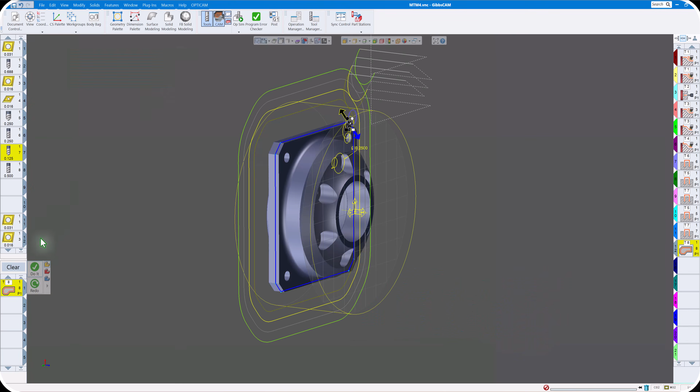So let's go back here and turn this off. Let's go back to maybe 2 extra offsets. Let's look at the rotate tab - we want to do polar and cylindrical, of course - and we'll click on redo.

Now let's take a look at it. We'll fast forward to that operation and again look and see how it looks. Arc in. Okay, so far so good. Let's speed it up.

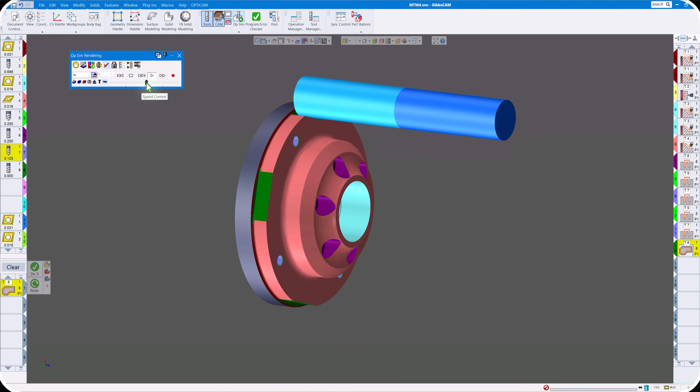Now our next cut. Next cut. And looks good - that roughed it out.

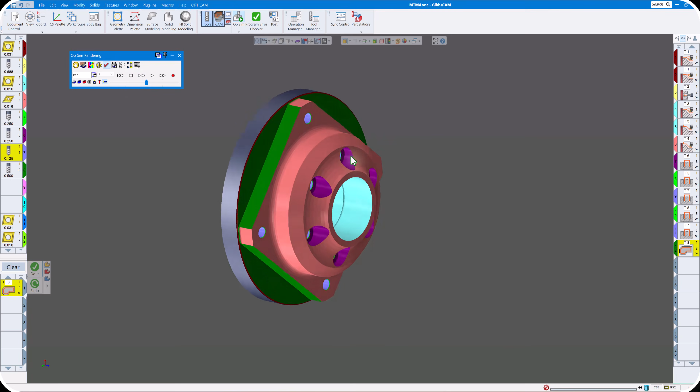Now we need to take a finish pass on here, again with a contour. Just choose an empty tile over here with the same thing, just a contour. This time we're going to put 0 there, and we're going to zero out the stock there. Everything else is still the same, so we'll just click on Do It. Now this should be our finish pass here.

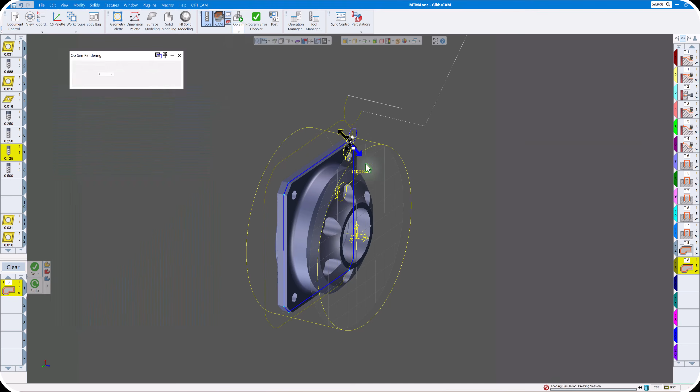We'll speed this up again to the end, and let's go a little faster as well. So there's our rough, and our next rough, and our next rough, and then 10th thou to finish. Everything there looks pretty good.

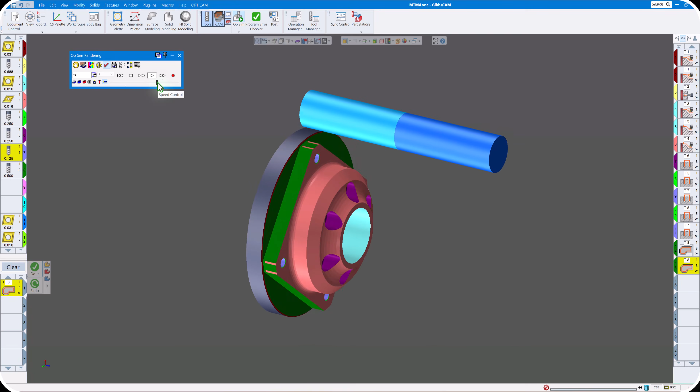Now this finishes part 1 of part 4, but a few things we can do here to speed things up so we're not rotating the turret more than a couple times to use the same tool. You can see we have tool number 6, the 1/4 inch end mill, which is fine. Tool number 5, the spot drill. Then we go back to tool number 7, then back to tool number 5. Well, tool number 7 is the 1/8 inch drill.

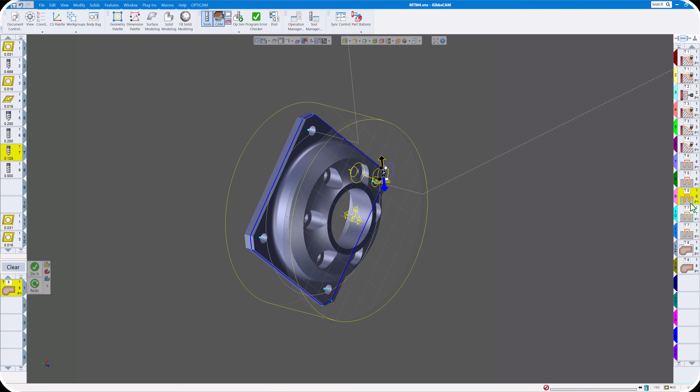So let's move the spot drill up between these two - just drag it, put it between that little triangle. So now we have tool number 6, the end mill, then our spot drill, then spot drill, and then we're going to take the 1/8 inch drill and drill and drill. That way we don't have to go and change the turret a number of times.

So if we render this again one last time - turning. Okay, now we have our end mill. Now we're going to spot, and at the same time spot the outside, then drill, then drill.

So the next thing on part number 2 will be, of course, to transfer it to the sub spindle and finish this off. But this concludes part 1 of this MTM part number 4. So thanks for watching.